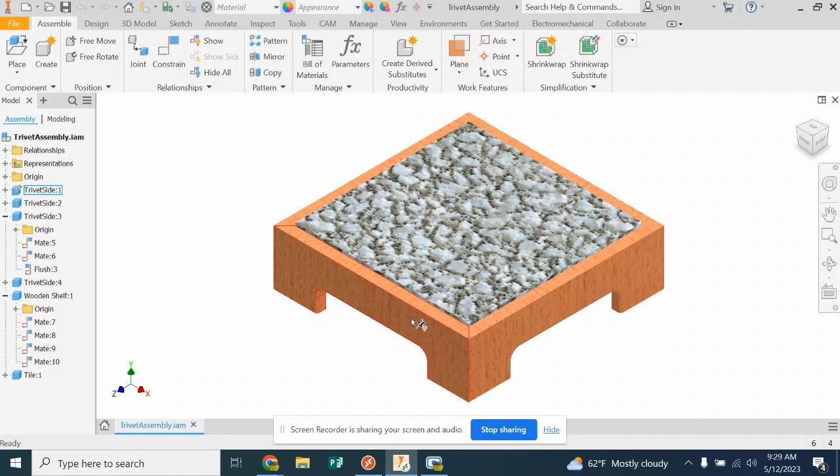Hi everyone, we are designing trivet sides in this video. We're going to start with a new standard IPT.

We're going to do a 2D sketch on the XY plane. Click and let go, and we're going to start by drawing a 2-point rectangle. So I place one of my 2 points, and now I'm going to type in my 2 dimensions.

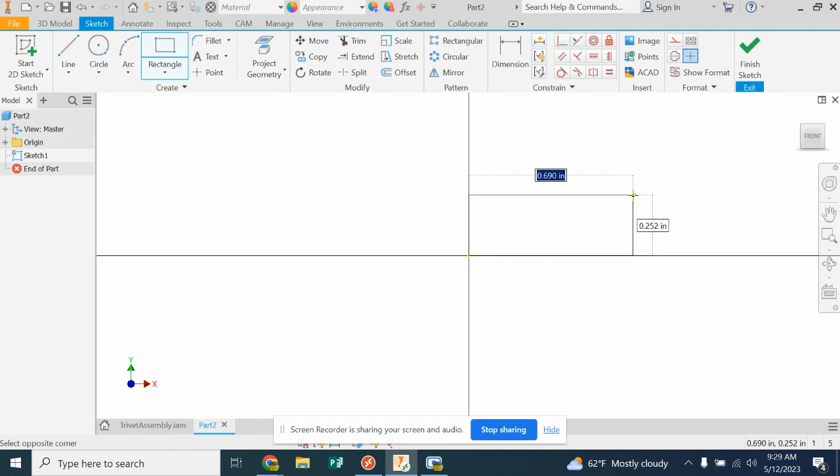Technically your trivet sides can be different sizes when we build them, but for now we're going to start with a 9-inch wide piece and 2.5 inches tall. This is all we need for our first sketch, so we're going to say finish sketch.

I like to go to my home view, and I'm going to extrude it a 1/2 inch thick. So 0.5, enter.

Right away, before I move on, I want to make sure I save this so I don't lose it. So I'm going to go File, Save As, and make sure I'm putting this into my H drive for the save-in location. It is called Trivet Side.

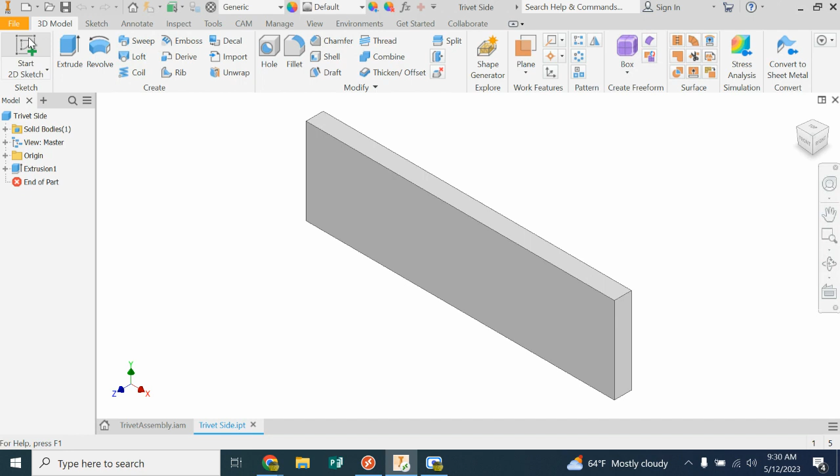Next, we're going to start a 2D sketch on the front of our piece. We are going to design the handle holes the same way we're going to physically build them in the wood shop. We're going to start by drilling 2 holes with a Forstner bit and then using a bandsaw to cut out the shape. So let's grab our circle tool.

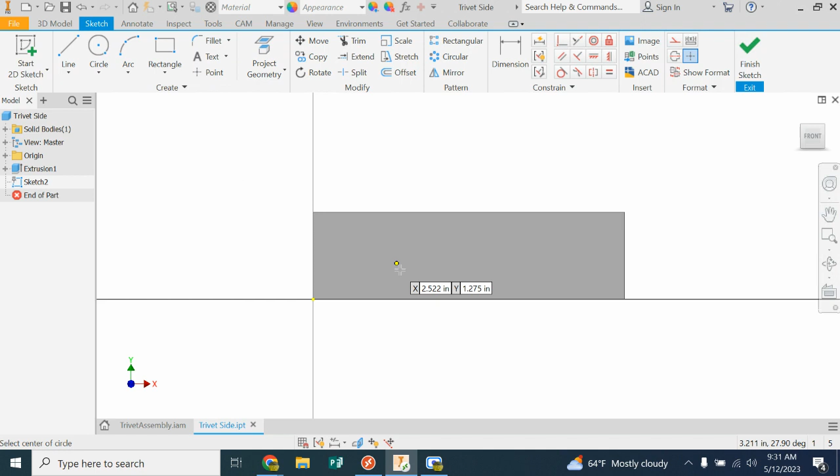I'm just going to go anywhere on this front surface. I'm going to click, move, and draw a 1-inch circle. I'm going to click, move, and draw another 1-inch circle. 1, enter. Now we want to locate these 2 circles with some dimensions.

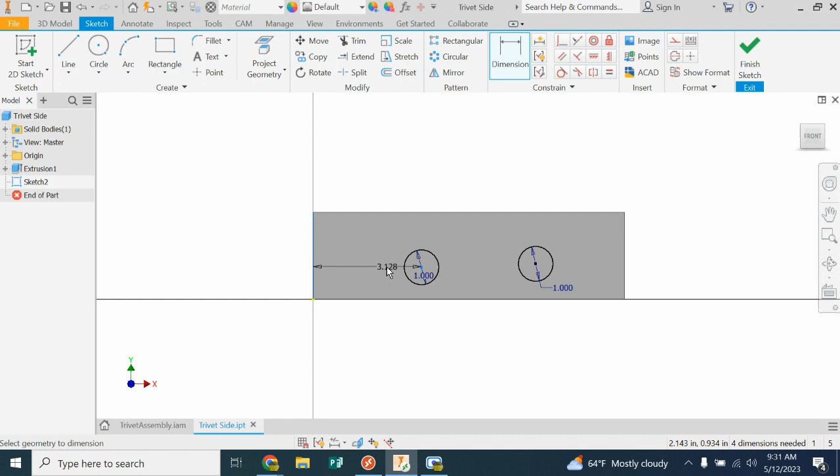I'll start by going from the side of my part to the middle of my circle. That was 2 clicks. Move my dimension off my part and between the arrows, and we're going to make this 2.5 inches from the edge.

Next, we're going to do the same thing with the other circle, from the edge to the middle, 2.5 inches.

I'd like these to be at the same height off the bottom, so we're going to do a dimension from the bottom to the middle, and we're going to make this 0.75 inches from the edge. From the bottom to the middle, 0.75 inches.

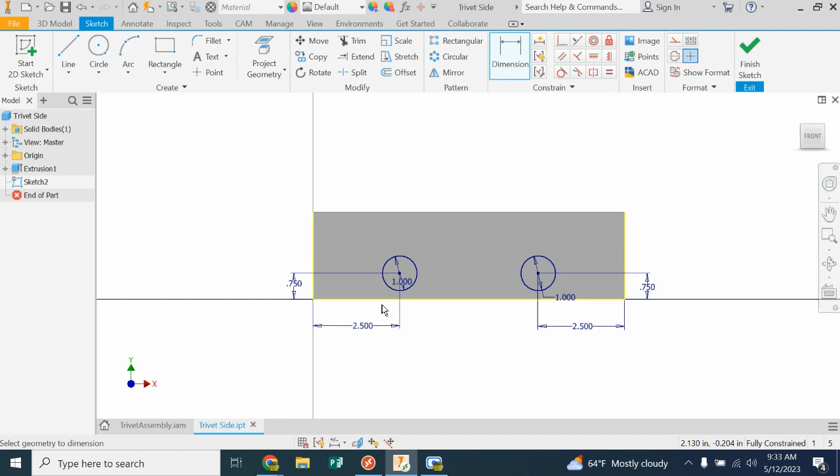So we have our part. We've planed it, we've jointed it, we've ripped it. We're now drilling 2 holes in it with a Forstner bit. When those are done, we're going to come in and cut this shape out using a bandsaw.

So in Inventor, we're going to use the line tool. Now I'm going to take my line and very carefully snap to this quadrant right here. Click. And I want to move my mouse straight down at 90 degrees down to the bottom of my part, and I click. Same thing over here: click from that quadrant and go straight down to the bottom line and click.

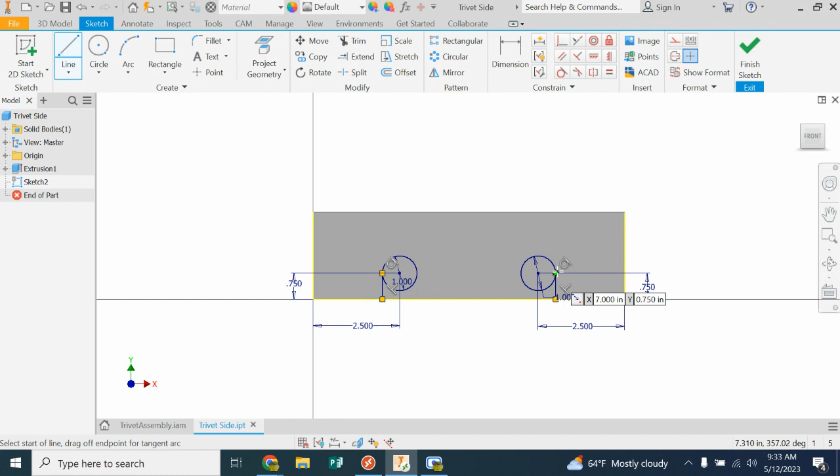So we're doing bandsaw cuts straight in, straight in. Let's go ahead and connect these 2 lines. Although there is a line on the bottom, we need to make it solid by putting a line across from point to point.

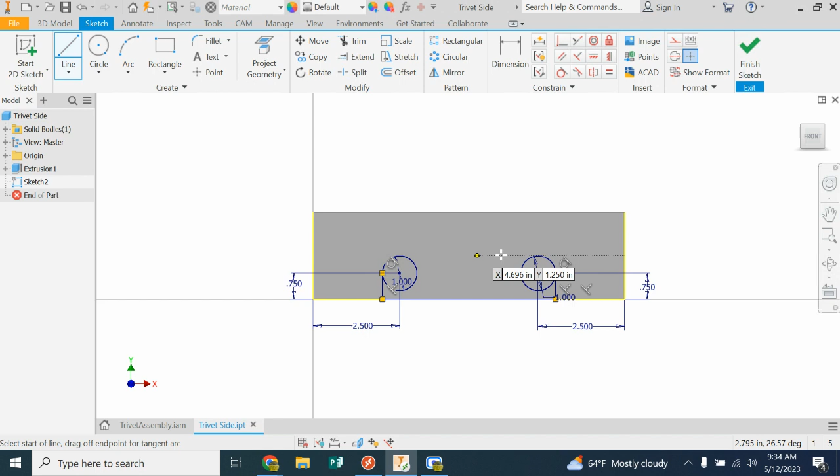We're going to take our bandsaw and put it in this hole right here, and we're going to cut across the top, from the top quadrant of one circle, nice and even to the top quadrant of the other. Here is our handle hole.

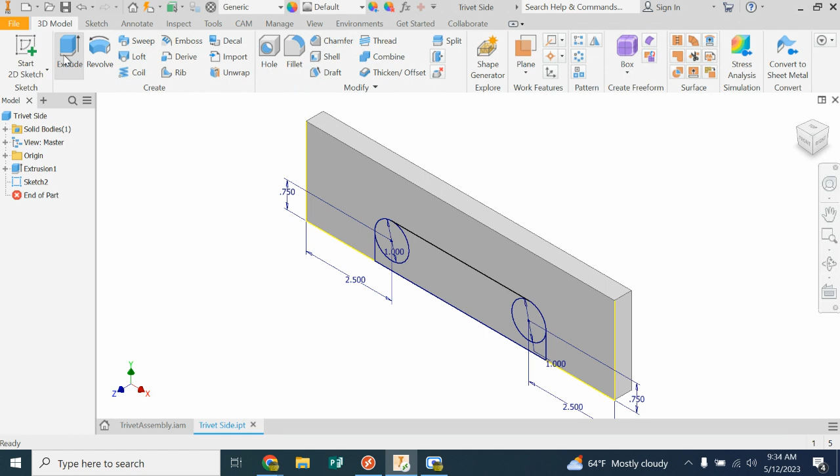So we can finish our sketch, and we're going to cut all of this shape out. To do that, we use the extrude tool. It's waiting for us to tell it what to extrude.

I want to extrude this circle, this middle part, and this circle. I'm doing all of them. Instead of extruding join where it pops out, we're going to tell it to extrude cut.

And we could leave it at half an inch, but I like to use the through all button right here. So it just goes half an inch in.

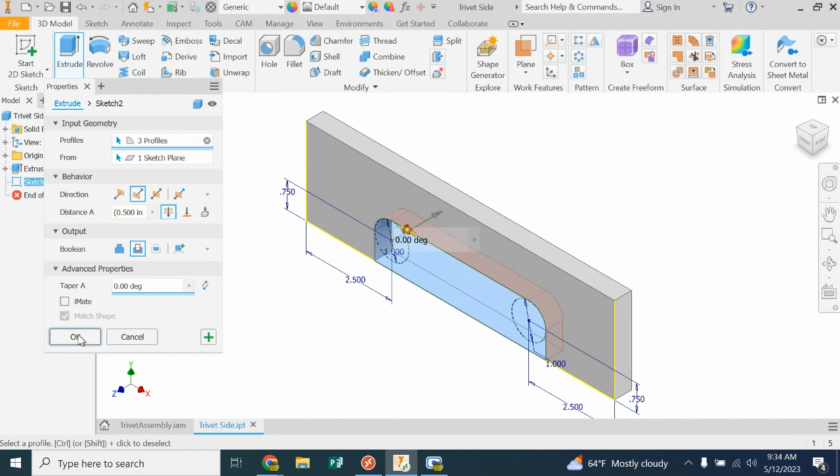Next up, we need to cut our miters on the corner. We're going to use a miter saw for that. In here, we're going to use the chamfer tool. We're going to chamfer a specific distance. We need a 1/2 inch chamfer, so 0.5.

And I'm going to chamfer off this corner right here. And I'm going to chamfer off this other front corner. Apply it. Cancel. And I now have the miters that I need to connect these.

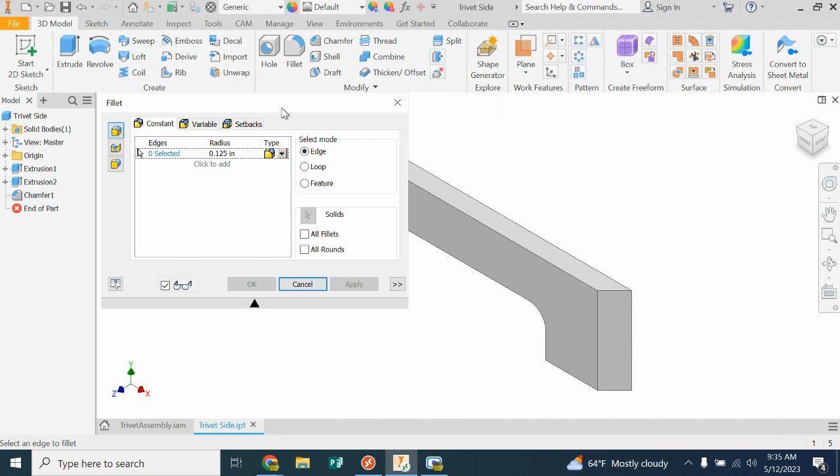Last up, we're going to use 2 different routers. I have a handheld router and a router table to give a round over. So let's start with our fillet tool. We can leave it at a radius of 1/8 of an inch.

We are going to fillet the edges of our handle hole so it feels a little better in our hand. So we're doing this front edge right here, and we're doing the back edge. We'll apply it.

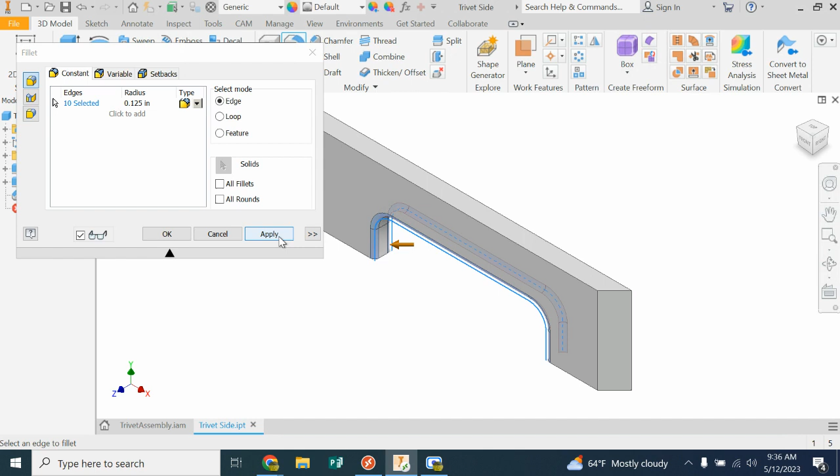We're also going to do a fillet on the outside of our part. So the inside of these cuts, this is the inside of your part. The back side is going to be the outside of your part. So I want to fillet this top corner over here. Give it a nice little round over. Apply it. Cancel. And we're good. Let's go ahead and do a quick save.

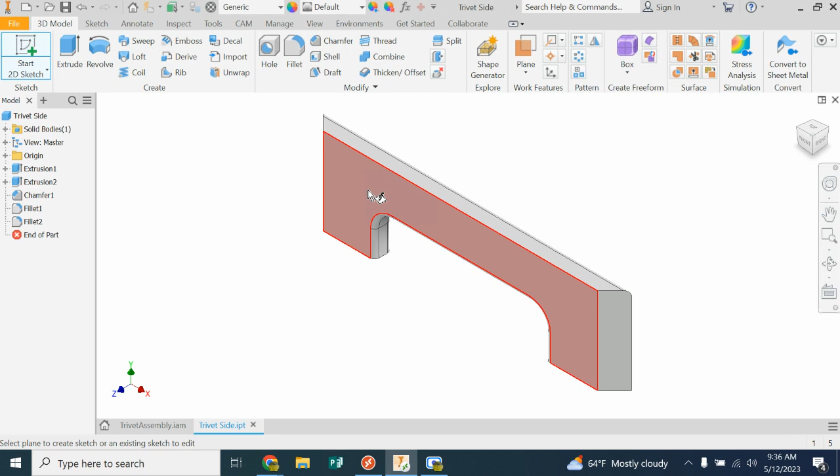Next, we are going to create a dado slot for the wooden shelf that's going to go into these. So we're going to start a 2D sketch on the front of our part. I'm going to click the word front. We're going to draw a rectangle, and I'm going to start my rectangle way over here. I want to start it outside of my part with 1 click.

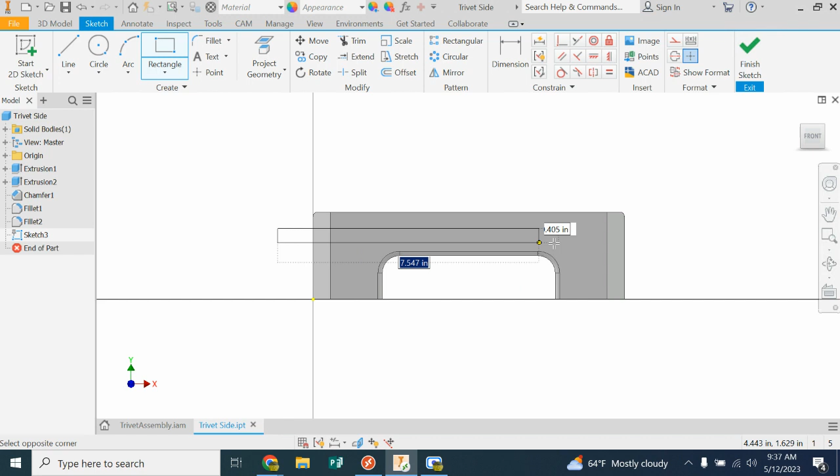And then I'm going to move my mouse way to the right, but I'm not going to click again. If you did accidentally click, you can always hit escape, hit undo, and try it again. So 1 click, move your mouse. We're going to use the tab key right away to switch from that highlighted blue number, and I'm going to tab over to the height.

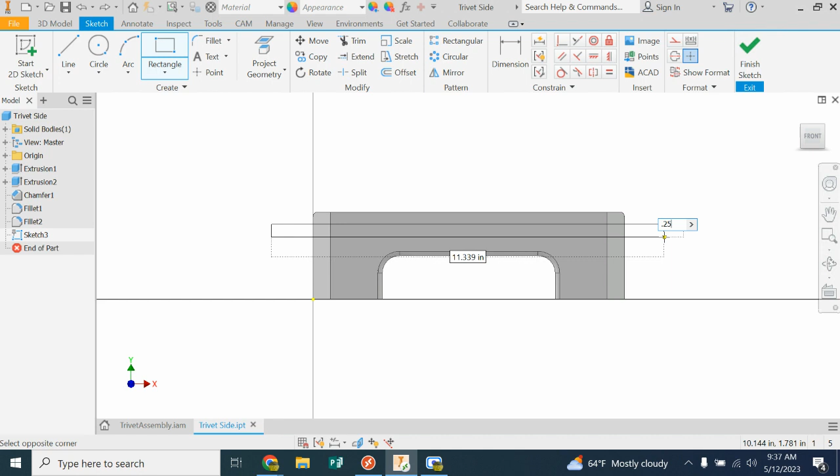We're going to make the dado fit the plywood that we have in the shop, but for now, as we design it, we're just going to assume that that plywood is 1/4 of an inch thick, which is 0.25, and we can hit enter.

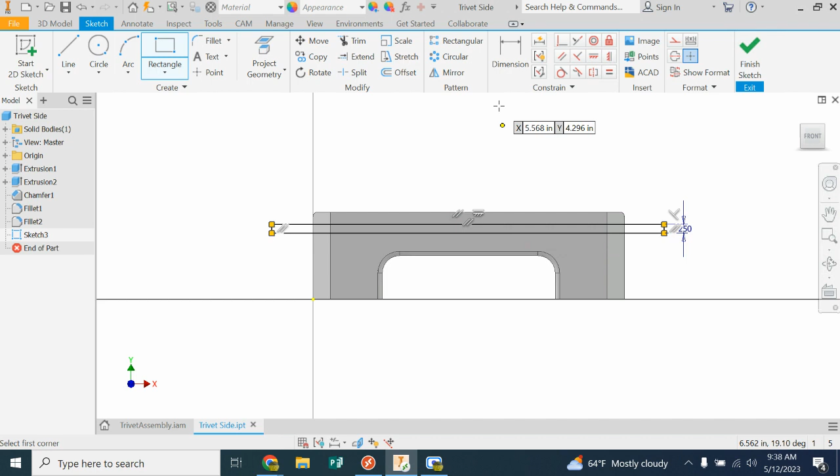Now, this has to be a very specific distance from the edge. The tile that we put on here needs to sit proud. It needs to sit above our piece. So we need to have this groove close to the edge using a dimension. We're going to dimension from the top of our part, click, to the top of our groove, click. We're going to place this.

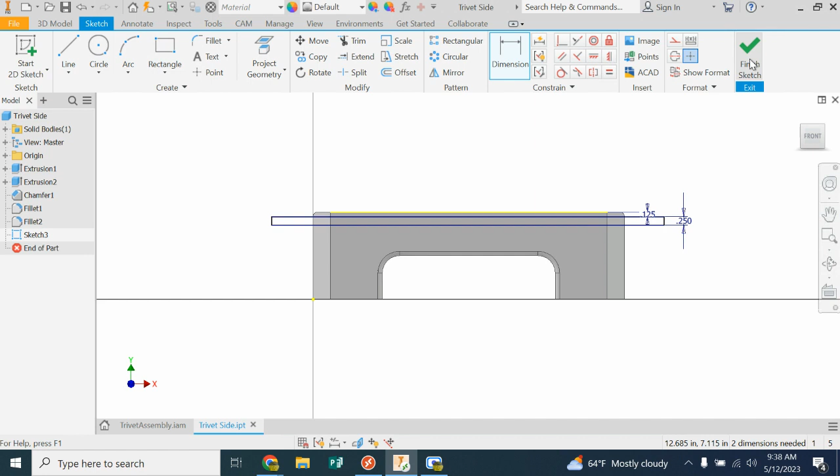And just for design's sake, we're going to put in 0.125, which is 1/8 of an inch. Go ahead and finish your sketch. We're going to do an extrude. We're going to do a cut. And we're only going to cut this halfway, which is 0.25 or 1/4 of an inch.

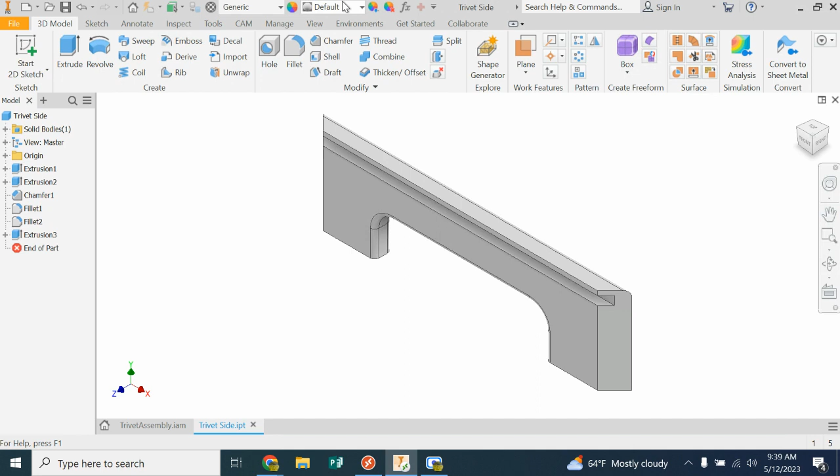Go ahead and save. We finish this part by giving it some sort of color or material. I like to click where it says default. You can pick literally anything you want. We're going to make ours out of red oak, which is what I'm going to do. Red oak. I'm going to click save.

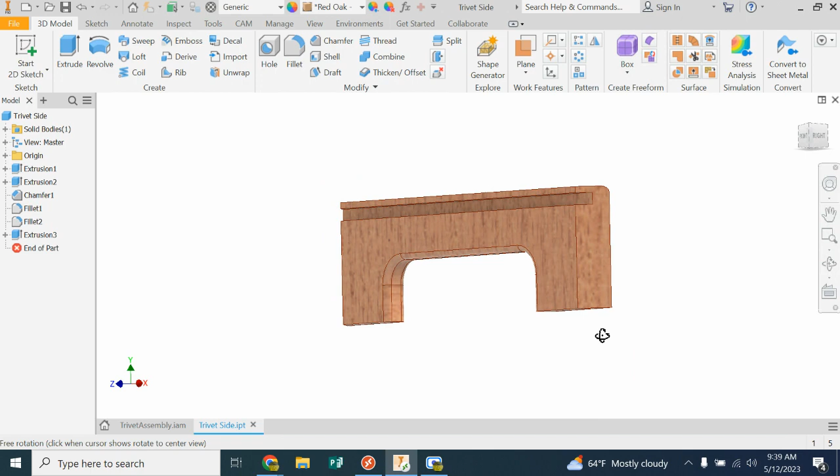And you now have one of your 4 sides. They're all the same with our mitered edges, our drill and bandsaw and routered handle, and our table saw dado groove, ready to be assembled and put together in a square like this.